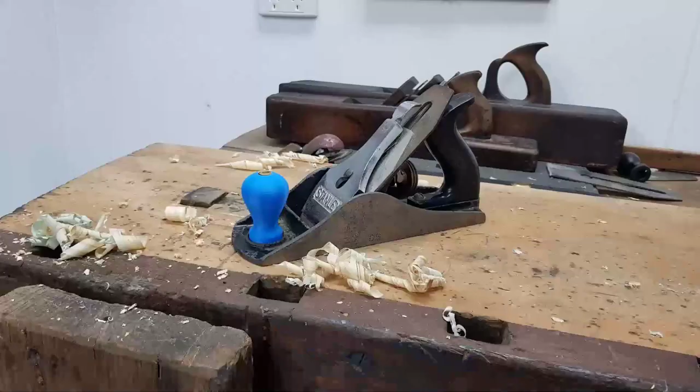Dave here, how are you? Today is the 16th of June, not too long to go to the winter solstice, and also the end of the financial year in Australia. Today it's wet outside, raining and 10 degrees Celsius. It's not much warmer in here.

In Australia we call the thing we put over the top a jumper. You guys in the States might call it a sweater or something like that. We call it a jumper, and some people think that's really weird, but that's how it is. Anyway, today we have a packed show.

I hear a few people haven't been well, changing temperatures and all that. It is going to affect you. I had a bit of a sore throat during the week and thought, here we go, I'm going to catch the flu or some bug. I had options - not worry about it and let it run two weeks, or go see a doctor and get antibiotics. I thought no, I'll go to an old formula to start, see if that knocks it on the head. And it did - saltwater gargle. Some of the basic things we bypass and just go straight to the extreme thing.

So saltwater gargle a couple of times a day, two days, gone. Totally gone. I was thinking I may have to get someone to do deaf and dumb sign language and get someone here to actually do the talking for me. But we didn't. There you go.

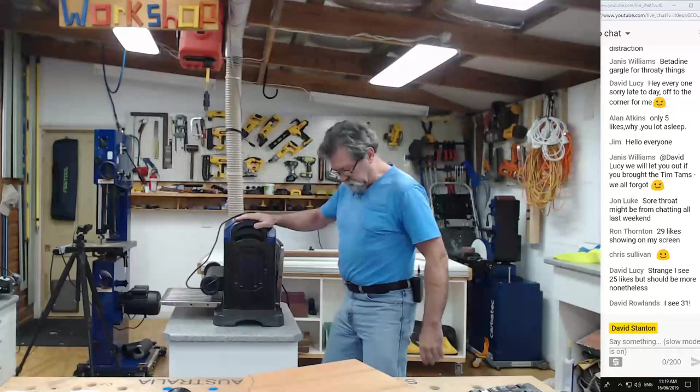Now this is clamped to the table to keep it safe so it doesn't go rolling, and I've got locks on the wheels as well so it doesn't go rolling away. And now I just move him over there, and I'll move this camera and bring this guy in. I want to put it in such a position where you can see what's happening.

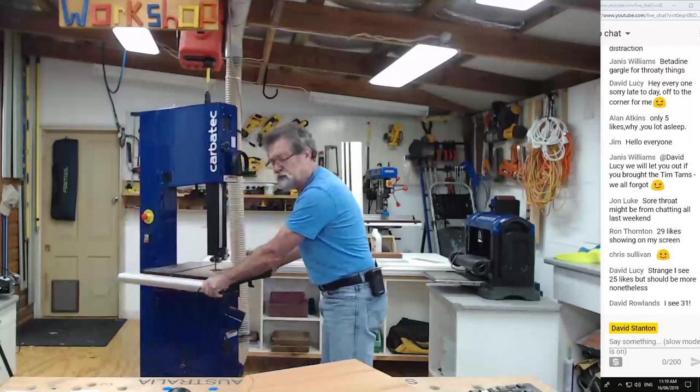Whoop, what do I call it there? That's the clamp, move it. There we go, you should be able to see what's going to happen there. I'll plug him in again, like so. And the dust extraction port.

Tighten him up. Good, and the dust port is open. I'll move this little camera to, let me see, there. Should be okay, and switch the cameras.

You always knock the table out of square if I grab it for wheeling it about, by the fence or table, you knock everything out of alignment. You know what, guys? The wheels on this thing are brilliant, and the lock on this table is fantastic. But thank you very much for the info.

I'm going to switch this around back to there so you can see what's going on. I think that'll work, so if I'm over this side, you'll see what's going on. And again, I'm going to wear the eye muffs. And I need to get the height correct.

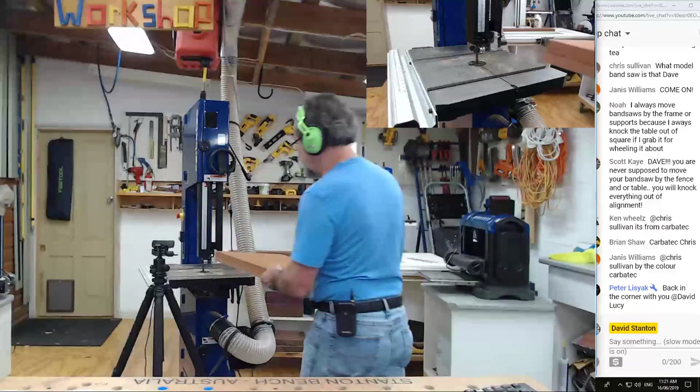Reduce that, and up we go. And down a touch, lock him, and then take it off the wheels. I won't touch the table. There we go, you happy, guys? All right.

So that's all good, I'll turn the Dusty on. Quick drink of coffee. Roger that. Dust extractor, come on, there we go.

All right, I'm not going to finish off, you can see what's happening here. I'm just going to take it running up, I will shape that later on. I want to follow this line. I've got a black felt line beside it so I can see the pencil line a bit better. Let's see how we go.

I'm going to do some relief cuts to start.

This has got a brake on the blade, it's an electronic brake. So rather than drag it, that's pulled all the way back. Rather than drag it backwards and risk pulling the blade back off all of the gear there, that's what I've done. All right.

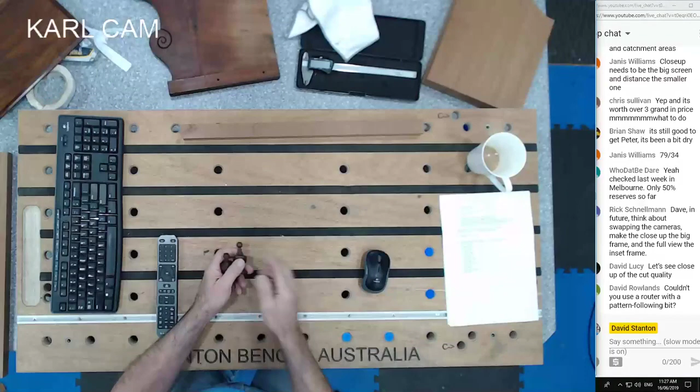Now I'm going to switch cameras to Karl cam so you can see it easier. Up to there, so these are the two. Now the one on my left, this one, is the one that Theo made for me at the show, and that was brilliant watching that. And then this one is the original.

I'm going to clean this one up to look like this. Why? Because the other parts that I'm cleaning up, and this is a part that I've cleaned up, that is a much better match than that. You want to see, I could have done it like that with a pattern following bit, but it's more fun using the bandsaw.

Okay, you want to see the quality of the cut? It's not bad. It's straight. You want to see how good it is? Let me get the square out and we'll have a look.

I haven't prepped for this part, so let's go to the main camera again. You can see my hands there. I haven't changed anything. So you want to see, oh, how good is that? Look at that.

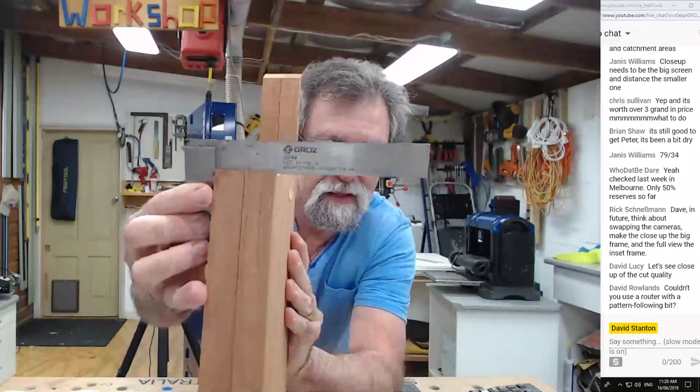And then up the other side. I don't know if you can see it from there. We'll flip it right over, and that's a good indicator, isn't it? Because it's not bad, and I'm happy. I'm happy with the quality of the cut.

As I say, a little bit on the disc sander and the bobbin sander in there, and away we go. Now we're going to clean one of these up. I did this the other week, but let's do it again.

This stuff, the polish reviver that I was using, and the steel wool. Now last week we were at the show, weren't we? So it was the week before.

Vicky cringed when she saw me drag that out of there and polish. She said, 'Oh, you'll cut yourself,' because she had a nasty accident with steel wool, but it was much coarser than this, and it did cut into her finger. So this stuff, being 000, isn't going to have the same effect.

Couldn't use a router with a pattern following bit for this. Damn fine work. Thank you, David.

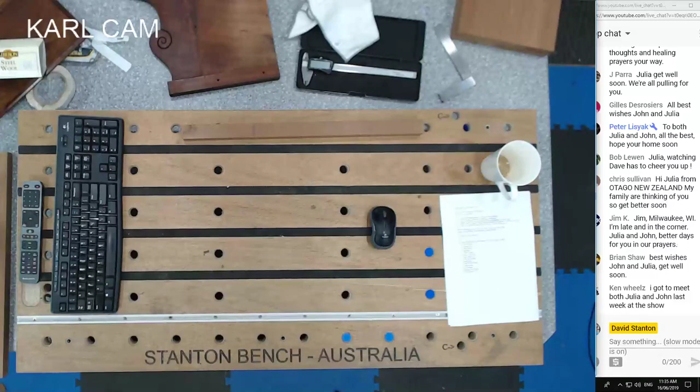Now my mother-in-law will switch the cameras. My mother-in-law is a fan of things that are nice in the garden, so I have this set of wind chimes, which is a monster - these things make a beautiful tone. These used to be hanging up in my willow tree above a nice big table and seats underneath it. But the string holding it up rotted, and every now and then one of these things would just come spearing down like a javelin. I thought, that's no good, we've got to move them. So I took them down, and they've been sitting in the shed for ages. I thought, high time, we'll set them up outside her place, some more chimes for her. So here we go.

I'm going to put those all to the side, and I'm going to take us all into Aspire. Let me see if I've got all of this here - main camera with Aspire.

Now I'm going to do a transition in a second. So what will happen is it's going to take everything over to here that I'm looking at, which is what's running the show, and then I'll load Aspire up. I think I'll have a picture of me down in this corner talking, and Aspire will be up on the screen, and we'll still have the chat coming down here.

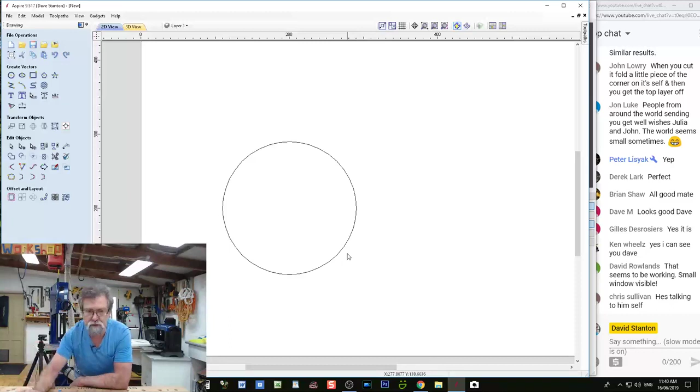If I left click here, I don't know if you can see what I'm doing down there. I'm going to tip that camera down a little bit, and hopefully you'll be able to see what's happening on the keyboard as well. Is that any better, guys? Can you see what's happening on the keyboard?

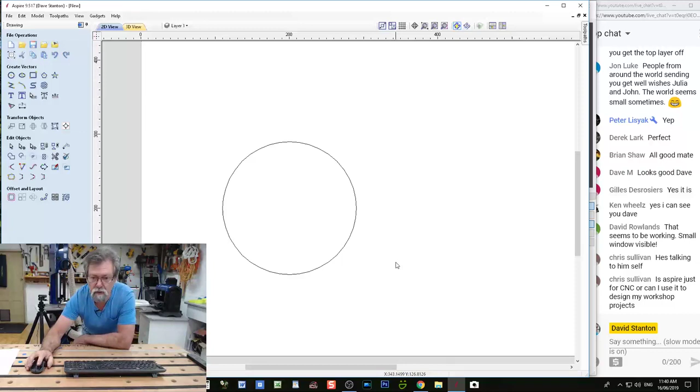Here and here. So I'm going to left click, just for CNC, or can I use it to design my workshop projects? Just for CNC, I think. Now I'm going to left click on the mouse and drag it up, and I'm going to wake that vector up. So I'm letting go of the left button on the mouse. And there you go, I've woken that vector up.

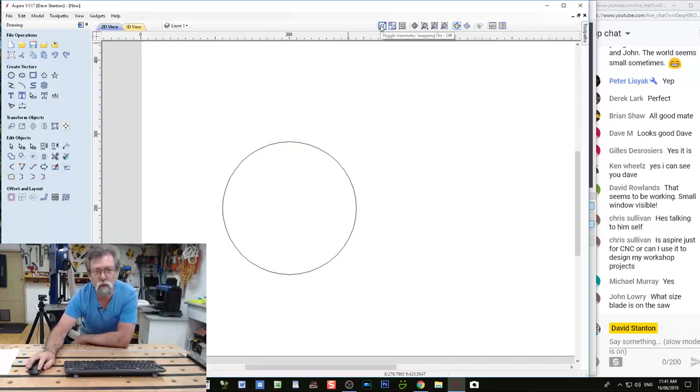Now I'm going to create another circle or two in here. So up the top here I've got this thing called snapping. So that's going to snap to geometry and also smart snapping. And that's going to help me a lot.

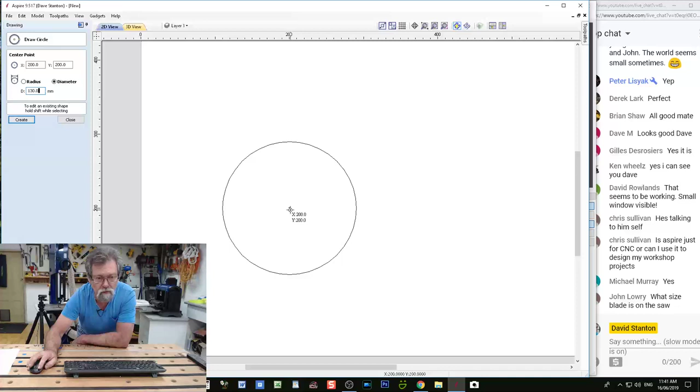So here we go, I'm going to create a circle, and I'm going to do 130 millimeters this time. And I'm going to just go there. See how that little dot pops up? That's called smart snapping. I could put a circle there, or I could bring it across, and there we go. Circle is dead center with the others. As I said, I could have hit this apply, but you know, this is quick. Now I'm going to do another, can you hear the rain outside?

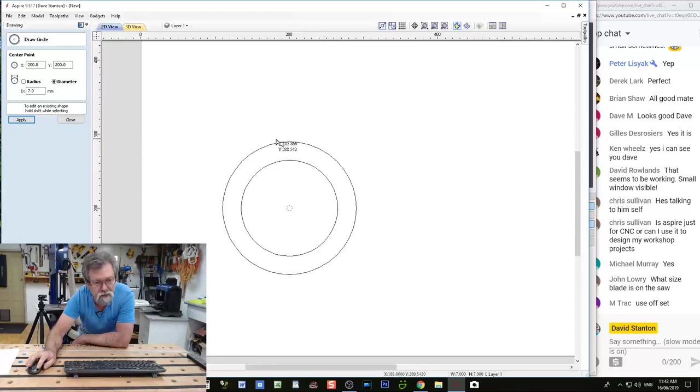It's bucketing down outside. I'm going to do a 7 millimeter circle in the center, and I'm going to do another circle up here for the donga. This is the outside of the circle - let me make it a little bit bigger so we can all see it. This is the line that the holes are going to be drilled in, and this is the center where I'm going to drill a hole later on. This is going to be a 7 millimeter depression, just letting me know where the dead center of the circle is. Now, I want 8 holes because these pipes - let me see if I've got one of these here, if you can see it.

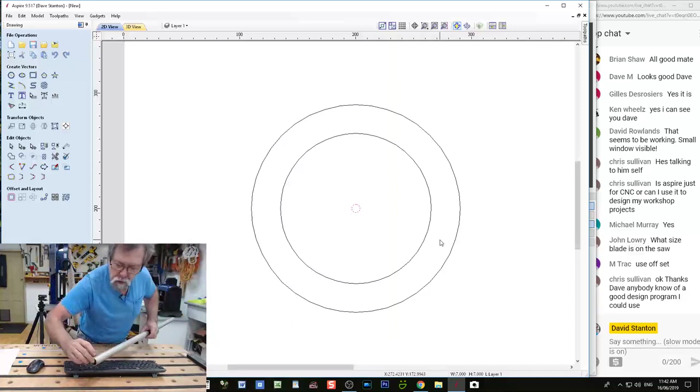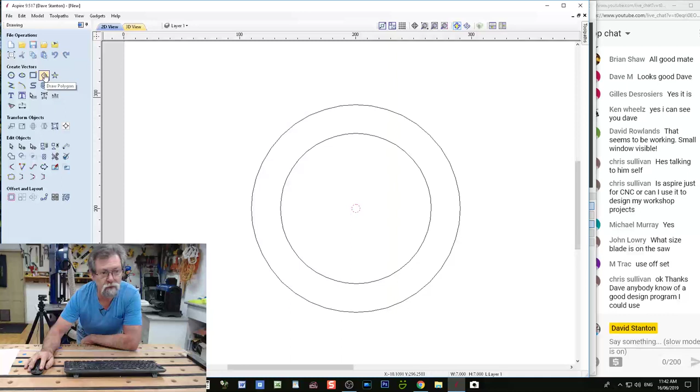These pipes have got these holes either side, with a little bit of pipe through the middle, so that it holds it steady and balanced, and also doesn't deaden the sound of the pipe. So I need to create 8 holes. Now the quickest way is I'm going to go to the polygon draw tool, and I've already set it to 8, but I could go to 9 if I wanted. So I want 8 sides, and half of the diameter - half of 130 is 65 millimeters - so that's what it says up here, the radius I've made 65.

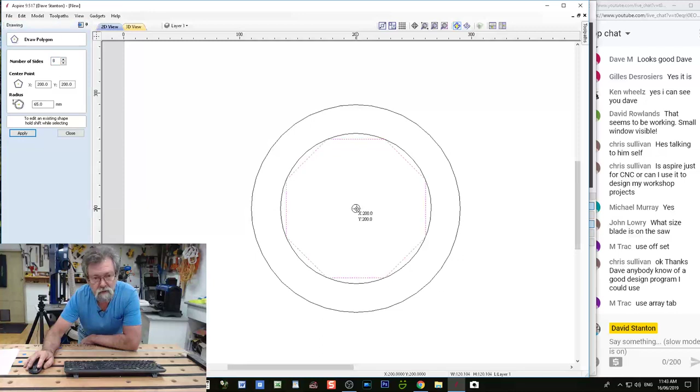Create - well, I'm just going to go there. Done. Now that's pretty sexy. All these other two vectors are sound asleep. This one's awake, and this one's asleep as well. Now at every one of those intersections of the polygon to the circle, that's a smart snapping point for geometry.

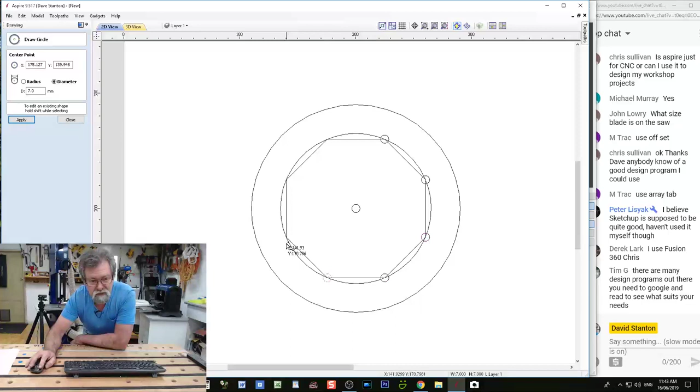So now what I'm going to do is go to the circle - 7 millimeters is what I want - and go there, smart snapping. Left click, left click, left click, left click. If you've got a computer game on your computer, you may want to consider binning it and put something on there like this to have some fun with.

Now I'm clicking off to the side here with the left mouse button, and that's put all the vectors to sleep. Now I'm going to highlight this circle and this polygon by left clicking and dragging up over the pair of them, and it's woken those two up. Now I'm going to push the delete button, and they're gone.

How cool is this? Now this is very similar to a piece of sandpaper. That's amazing - with the dust extraction holes.

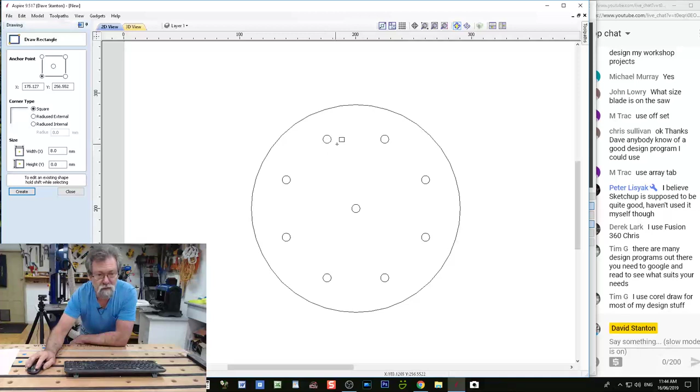Now what I want to do is create slotted holes. I don't want just individual holes because I want this to drain correctly when it gets wet on the outside. So I'm going to go over to the rectangular vector, and I'm going to smart snap onto the bottom, drag up until I hit the top there, and then let go. Going to do the same here, and the same here, and I hope they're working, and the same here.

All right, close. And you might say to me, Dave, well that looks fantastic, but what's all this rubbish here? We've got a special thing called a welding tool.

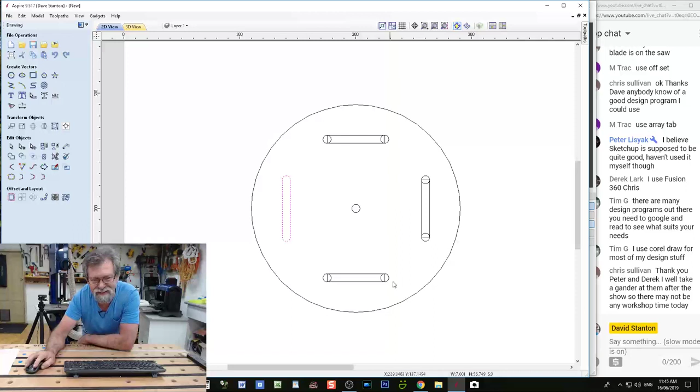Okay, so I've highlighted, woken all these vectors up here, and I said, you know what, I don't want anything in the middle, I want everything on the outside to stay there. So over here we've got this welding tool - there's 3 different functions, but watch this. How's that? And I'm going to do it to this one, weld those together, and the good thing about using the welding tool is there's no holes in the vectors. If it's not a continuous vector, sometimes my machine doesn't like it. So there we go, weld that one together as well.

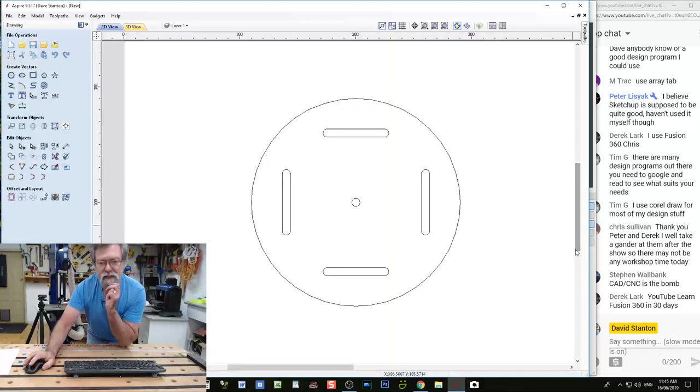There we go. Now I have that there, and I think I'll stop at this point here. And what we're going to do now is we're going to go with what's called computer aided machining. So I'm going to click this button up here, which is going to take us over to the toolpath commands. Now you'll see here I've got a whole new menu bunch over here. Now I'm only going to be using this guy here, that one, and that one.

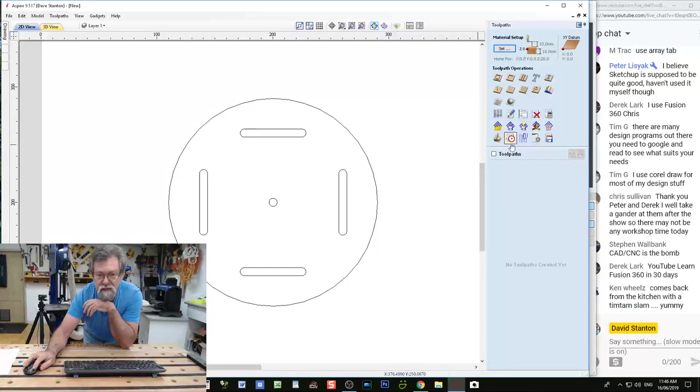So what I'm going to do is highlight all of it, wake all of the vectors up, and set it up for a spiral down cutter because I don't want any tear out. I don't have a spiral up/down at the moment for a 1/4 inch cutter, so I'm going to do all these with a 1/4 inch cutter.

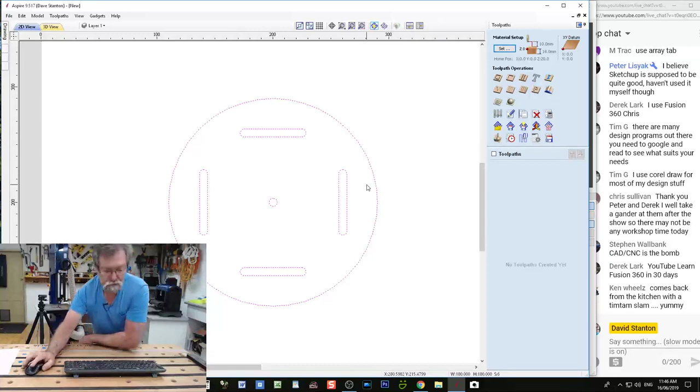With anything, this is basically just doing a drawing on a computer instead of a drawing with a piece of paper and a pencil. But this allows me to get extremely accurate and do stuff on the CNC.

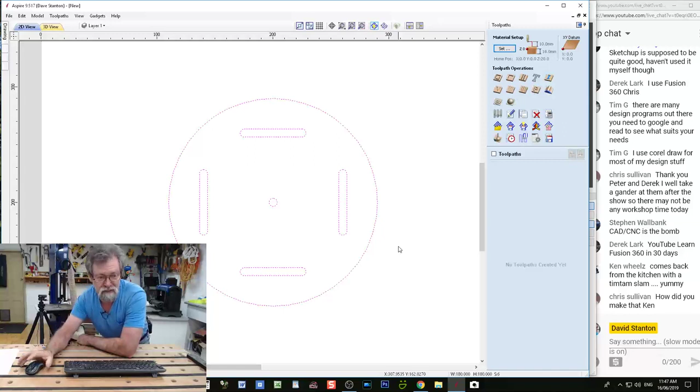So what we're going to do is push the shift button and select that vector and that vector. And, hold on, no, I'm going to select them all again. I'm just going to remove this one. I'm being an idiot. All right, that'll do.

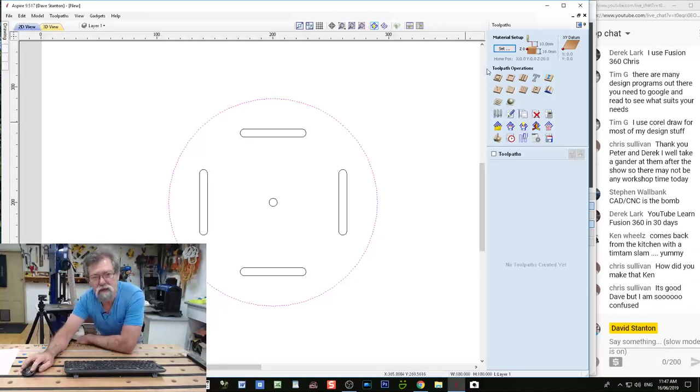What I'm going to do now is go to the toolpath, profile toolpath. I'm going to give it a name down here, and we're going to hit the caps lock. Perimeter, spiral down. Now that's going to let me know, when I save everything, what I'm doing.

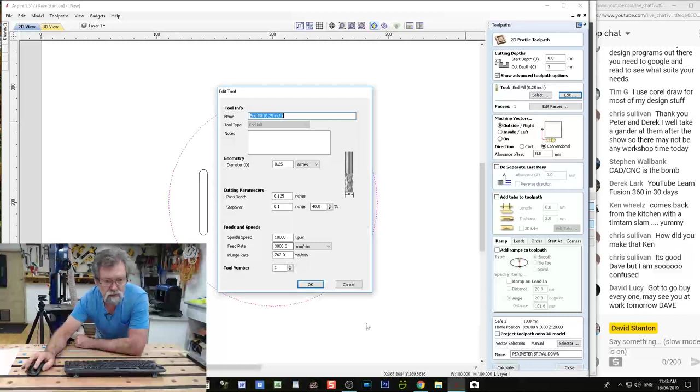So I want it to cut 3 millimeters and start from the 0 point. The tool I'm using is a 1/4 inch, which is 0.25 of an inch, sorry, 1/4 inch, which is 6.35 millimeters, spiral down. I'm going to have a look at what speed it's turning at - 18,000 RPM - and it's going to go 3 meters per minute. That's fine, leave that there.

And I want it to go around the outside. I don't want it to go on the inside of the vector, I want it to go on the outside, which means it's going to go that direction. In conventional, if it was climb, it would go the other direction. The climb means it wants to climb out of there, big time, so be careful with that. Make sure that you've got conventional. When you're doing carving, it's always climb, but conventional for when you're cutting out.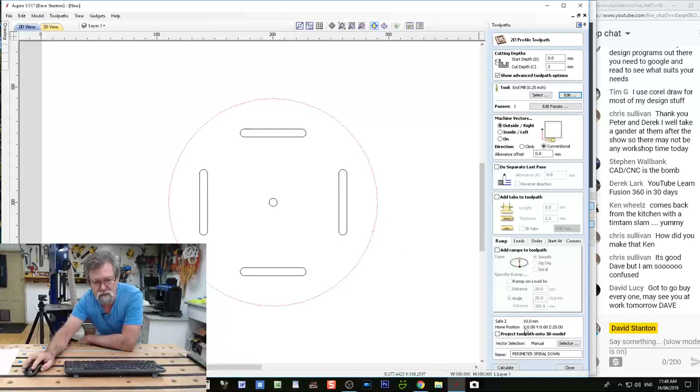I don't need any tabs or anything like that. I'm 10 millimeters down here. See that says the safe Z? That means whenever the machine goes to another point to start doing something, it's going to go up 10 millimeters above the board so it doesn't just start plowing trenches all the way through the job.

Okay, so that's all good, and I think I've got everything there. I don't want to do any separate passes. I don't want to add tabs at this point because I'm only going 3 millimeters.

Calculate. Now you can see there, it's shown it to me on that pine. I don't want pine, I want cherry. Why it did that, I have no idea. Cherry, there, lovely. Okay, now I can preview this, and I'm going to slow it down a little bit so we can see it happen.

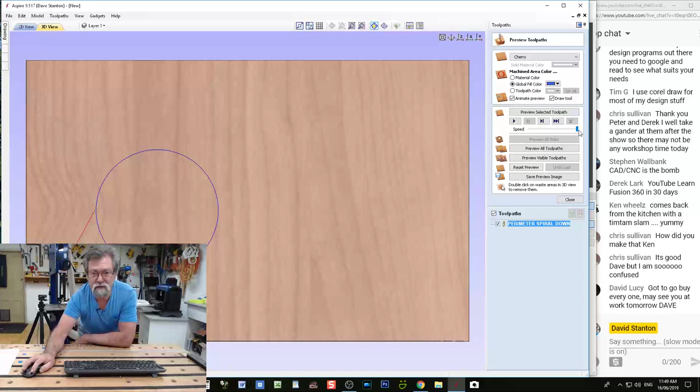Here we go. There we go. Now that blue is a color that's not the same as the background. If the cutter goes all the way through the board, I would see that mauve, not the blue.

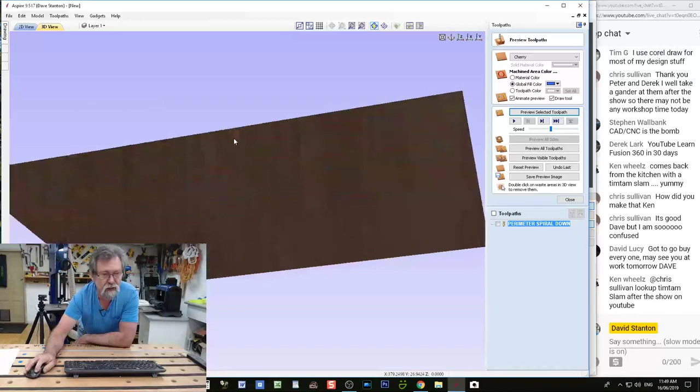And I can have a look at the other side by rotating it. I'm pushing my left mouse button down, pushing the mouse away from it. And you can see nothing has come through. Now I can go back over here, see this Z? It's going to say, I want to see the plan view. I push Z and it takes it back automatically.

There it is. Now I want to do some more work, so I'm going to go out of 3D back over to 2D, and I'm going to do some cutting on these.

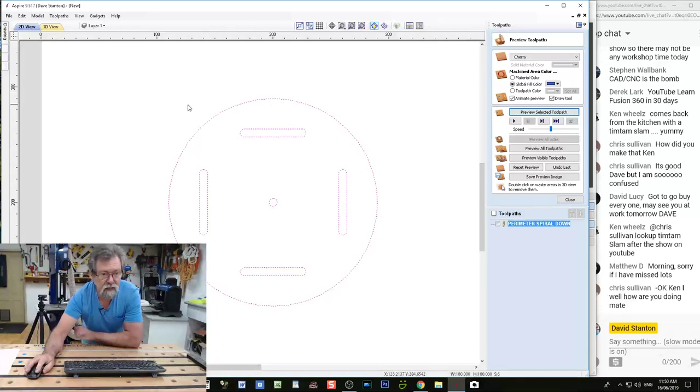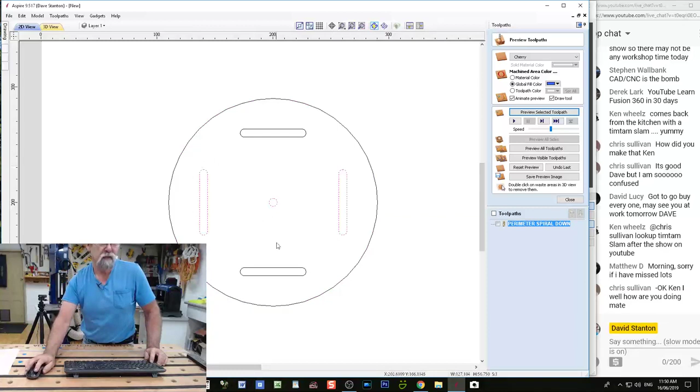Now I can highlight the lot again, and then click on, let me see, these, no, let's start that again. I'm just going to highlight them individually. That one, and that one. So I've left clicked on the mouse button and dragged it while pushing on the shift key. It's not the control key, it's the shift key.

We'll close this one. Now I want to do another toolpath, and I'm going to call this slots, spiral down, slots.

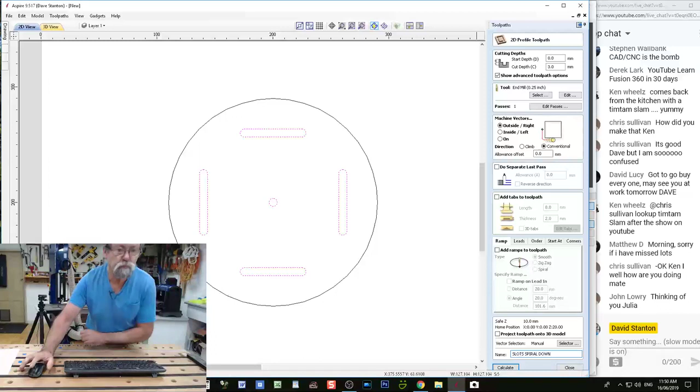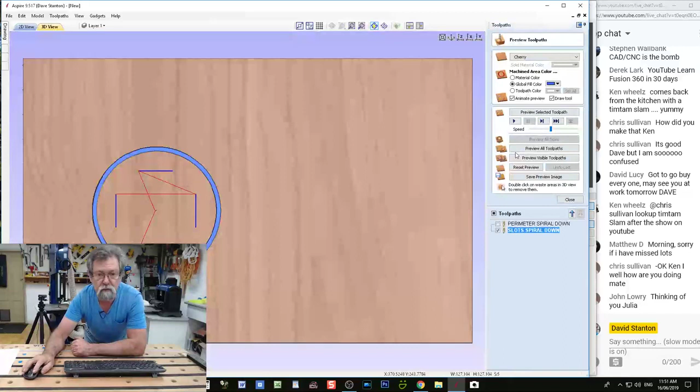3 millimeters is correct, and instead of on the outside, I want it on the inside of the vector, so it's going to go around the inside. Don't worry, I've had that mistake happen before. Everything is good there, all good, all good, all good. Calculate. Done. We'll have a quick preview of how it's going to go.

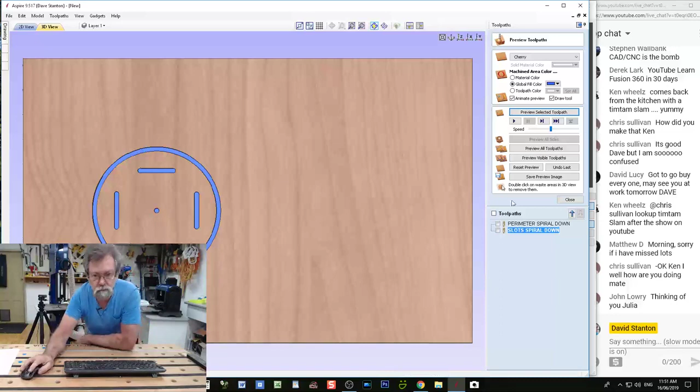Done. All right, now the thing is, the string is going to go from here to there, and from here to there, and from there to there. That's where the tubes are going to be held. This one in the middle is where the string is going to go down through the middle to hold the donger and the little wind paddle. Close that and go back to 2D.

Right, now whilst I've got that there like that, I'm going to create another, we'll just shut that. I'm going to create another toolpath, and I'm going to call this spiral up, because we have to change the tool and do that kind of thing. Give me a second. Okay.

Well, I'm starting to read some of the chat here at the same time.

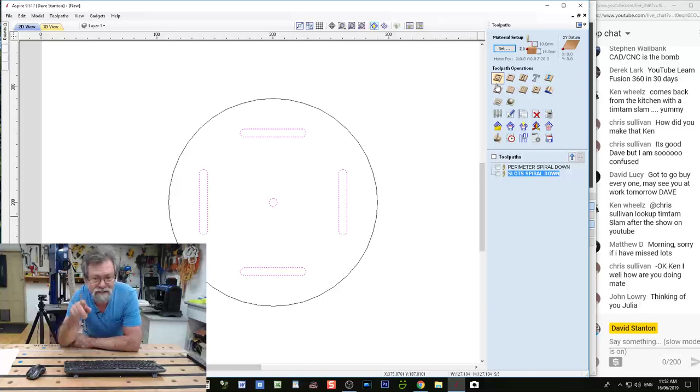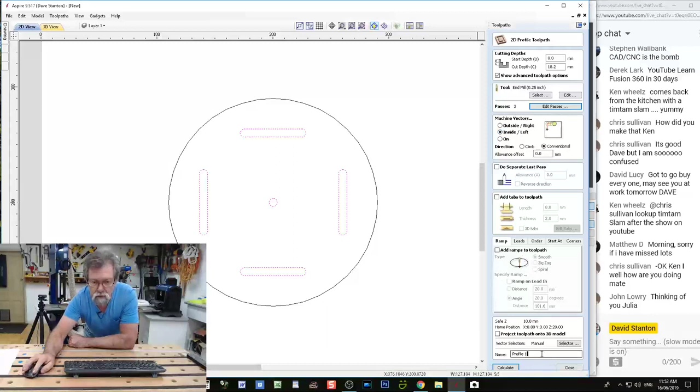I shouldn't be distracted. All right, spiral up, and we're going to do the same toolpaths, and this time we're going to make it 18.2 millimeters deep. And I want to edit the passes down to 3, so I'm going to click on that to 3, okay. And I need to go on the inside, which is correct. I don't want any ramping. I'm going to call this slots spiral up.

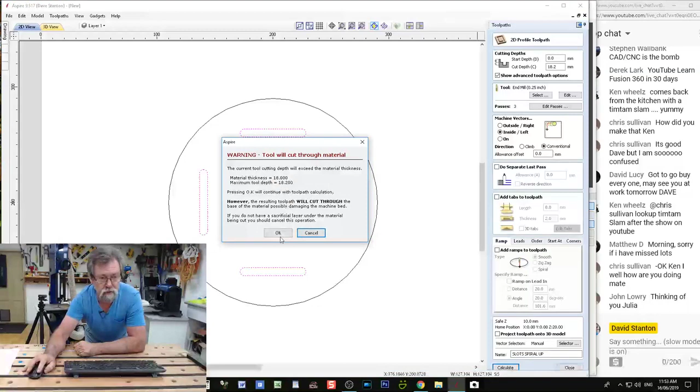And I think everything is good. When I click calculate, it's going to warn me that I'm going to cut through the material. There it is, 18 millimeters. Your cut is 18.2, are you okay with that? Sure am, buddy, that's what I wanted.

Now I'm going to preview that, and it'll take me all the way through. You can see the mauve appearing in the background. And I can roll the whole thing over so you can see on the other side, I have in fact come through. Go back to the 2D view.

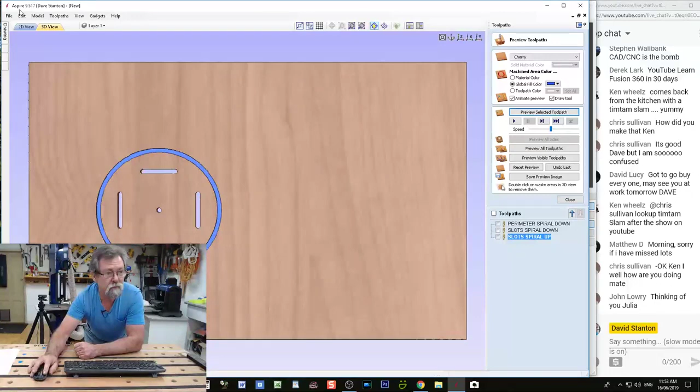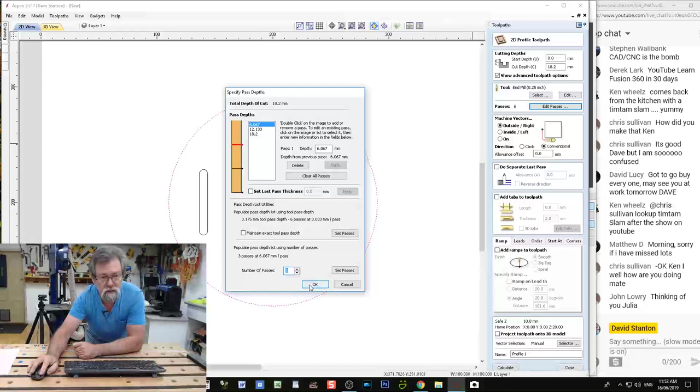And now I'm going to go back to 2D, close this view over here, and we're going to go onto the outside. And we're going to create the toolpath for that one, and go on the outside of this guy, 18.2. I don't want 6 passes, I want 3 again, because 6 passes, why would I? 6 millimeters is fine in one pass with that cutter.

Now here I need to be careful. I need to add some tabs. Now the tabs are the thing that I was talking about the other day on the video that I've just done. They're going to be 8 millimeters long and 2 millimeters thick at the bottom of the slot. And that's going to stop this thing, when it's cut all the way through, getting hit by the router cutter and flying across the room or smashing something.

So I need to edit the tabs now, and I want a constant number of 3 tabs. Add them, and there they are. Now I can add tabs by just left clicking on there, or I can left click on an existing tab and get rid of it.

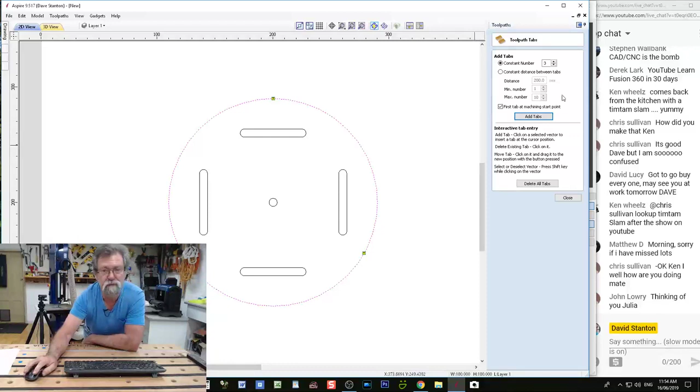That's good, and we're going to have a look. I'm going to make sure everything's right. 3 passes outside of the vector. Tabs are there. Safe Z is 10 millimeters. Calculate, I know it's going to go through. And now we're going to have a look at how it looks.

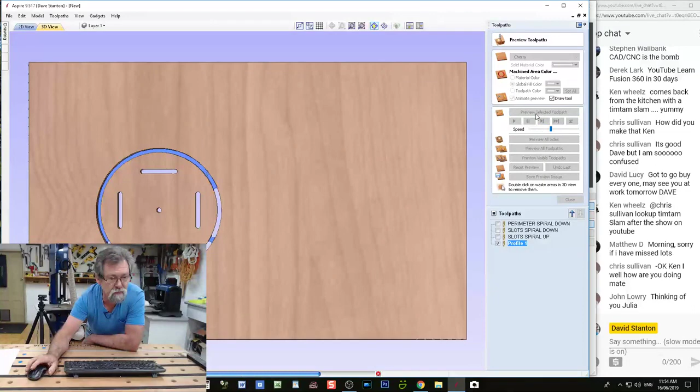Around she goes, 2 rotations, 3rd rotation, and left the tabs. There's the tabs there, see, it's like an Airfix kit. It's holding it together so that, you know, that could be dangerous. I'll flip her over and just make sure that I've gone all the way through on everything. Yep, beautiful, back to there.

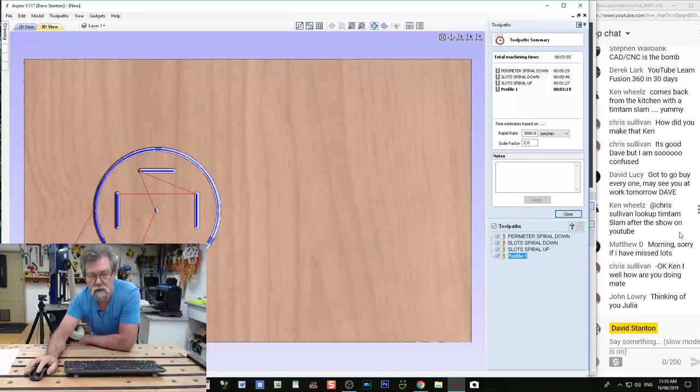And now, if I click on each one of these toolpaths and close this thing and have a click on the clock, it's going to tell me how long it's going to take to cut this out. 3 minutes and 55 seconds to do the whole job. But I do have to do the tool change, so it's going to be a little bit longer than that.

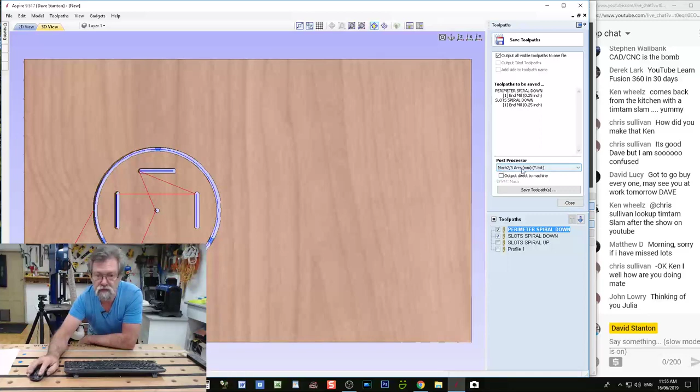Close that. Now I'm going to save the first 2 as a pair of toolpaths, like this. And you see it says spiral down, because I've got to change the cutters during the process, and I want it to be saved as Mach 3 in metric. So there's a whole heap here that I could choose from. That's the one I need for my machine. Save the toolpath, and I'm going to the USB, which is, I think it's this guy.

Perimeter spiral down, that'll be a good enough name for it. And so that's saved. Now I'm going to close those two, and highlight the bottom two, and save those toolpaths as slots spiral up. That's fine.

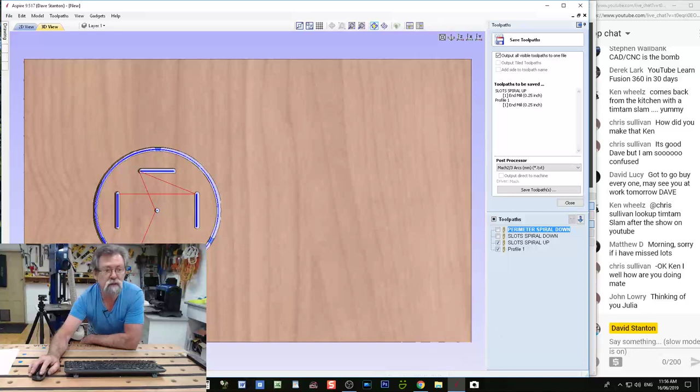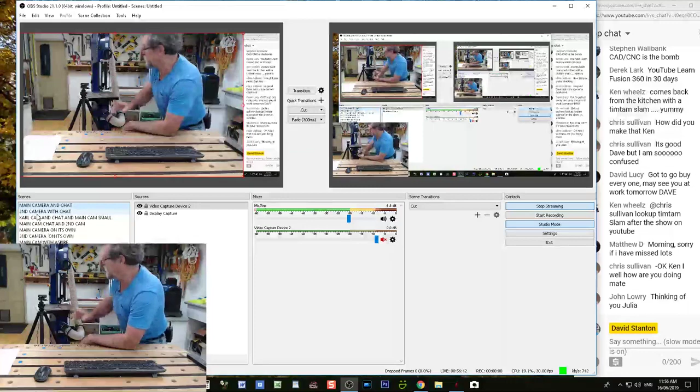Right, now I'm going to get out of this, and let me see if I can minimize that and go back to the main camera. Are you guys learning anything? That's reasonably quick, and it's very basic. Other people are much better at this than me. But let's head over to the CNC, and I'll get that main second camera.

Where are we? There it is. And I'm going to transition it now and take it out here. Where are we? Hopefully it doesn't catch on anything on the way through.

And I'm going to check that everything is looking okay there. You know what, that's not too bad. I'll tip it up a little. I can't quite see it from where I'm at. There we go. How's that? All right.

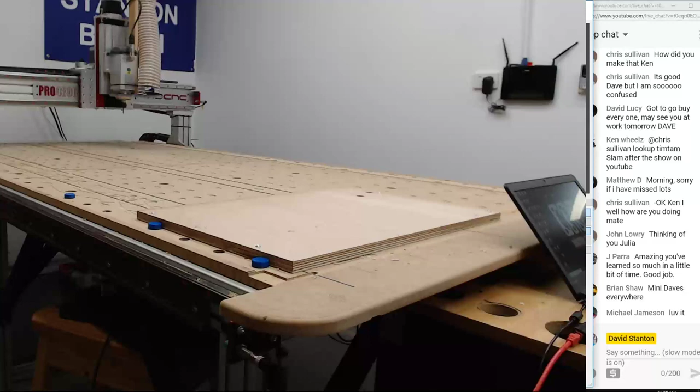First, I won't be able to read any of the chat while this is happening. Mini Dave's everywhere. Yep, Michael, you're enjoying it?

That's great. All right, I need my ear muffs, and I think I will use my remote as well out here. I won't put the ear muffs on quite yet. I'll turn the other lights on out here. There we go, a little bit more light.

Now I'm going to turn the machine on, and I'm going to load up. You might want to watch what I'm doing on the monitor as well. How's that? Yep, you can see.

All right, so down here, Mach 3, enter, and it's going to load up. So the first thing that's going to happen is the reset button's flashing, so I need to say, yeah, I'm aware. That's a little safety thing, so it just doesn't start.

Now I'm going to bring that guy back here, and to do it quickly, you push the shift button. Close enough, and then across, and then down. I don't push the shift button when it's going down, I don't want it to smash itself. Back over here, I'll bring this back over here now, because this is an interesting part.

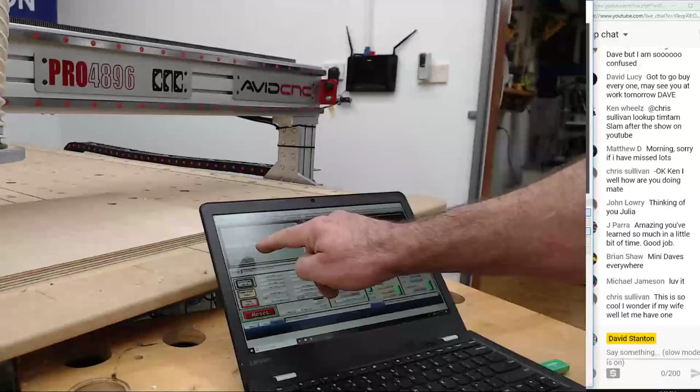And you can see over here it's got some stuff happening, and now it's all gone to metric. So I need to ref all home. And so what it's going to do is take this up to me and across till it's home. So up she goes.

This is the machine now talking to the computer and getting itself sorted as to where it is. Okay, now you can see over here, it's going to look really weird because it says it's 200 millimeters away from where things are, minus 1.6, minus this.

So now I'm going to use the touchpad to tell it where this corner is. So I'm going to now page down and across the x-axis and then back down the y-axis a little bit, maybe back a little, sneak it around.

Now we've got this thing called a touchpad. This guy here is what's called a touchpad. This is a magnet that's going to, well first of all, I've got these lips or little edges on the pad, and it sits on the corner of the material that I'm going to be cutting. This is magnetic and connects to there.

Now what's going to happen, when I tell it to auto 0 Z, X and Y, this cutter is going to come down and touch. I can touch this because the variable frequency drive is turned off. This is dead, nothing can start this.

I stay over here beside the emergency stop just in case for the first part.

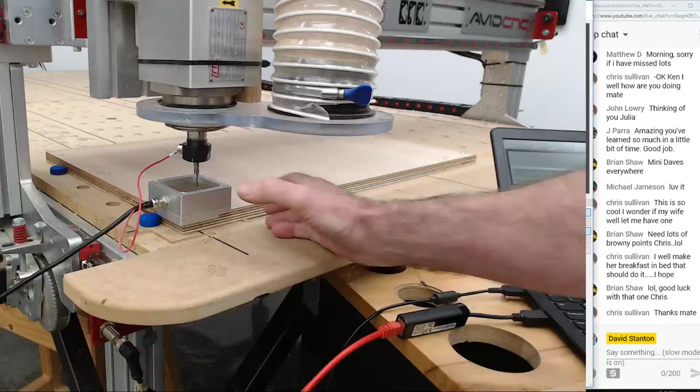Done. Now I'm going to make it travel this way and touch here. Because I've rotated the spiral cutter to the point where the edge of the flute is going to be the most outside part of that circle, or the perimeter of it, should be fine. Enter and it'll travel across.

Now I'm going to rotate it this direction because it's going to go down the y-axis now and touch over here. That's all sitting well. Down she goes until it touches and completes the circuit.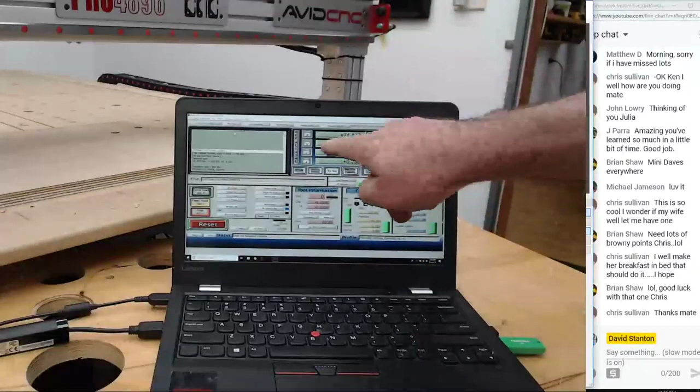Back and up. Beautiful. Now, you'll notice when I take all this off and put it down here on a sponge cushion, all of the coordinates now are different. It's saying 0 is 24 millimeters away from it is, 24.8272, and 38.1 above.

You watch this. I'm going to tell it to go to 0, and it's going to come right over to the center of the cutter. We're right on that corner. There we go. Go to 0. Isn't that insane? I love it.

Right on it. Now, I'm not going to put the dust shroud on, but I am going to lift it up a little bit. You can see the circle and all the coordinates, and you can see where the corner is right there. So I'm clear of that screw. I've put a screw to hold it down, and there's a screw way over here as well.

I think you should get a good view from there, so I'm going to move this over a little bit. We're about to start the machine up, so I'll start the dust extractor up in a second. I'm going to come back out here and have a quick look.

Don't try that with a V-bit. Do you have to do this with every project you set up? Yeah, but I'm slowing it down a lot for you guys. Once you start doing this kind of stuff, it's automatic.

Now I've got these guys on, so I'm safe here, and believe me, you want to wear them. I'm going to turn the dust extractor on first. That's outside. I haven't got the shield around here, but there is a bit of a draft happening here. It's going to throw a lot of rubbish around, but just for demonstration, you guys will want to see this.

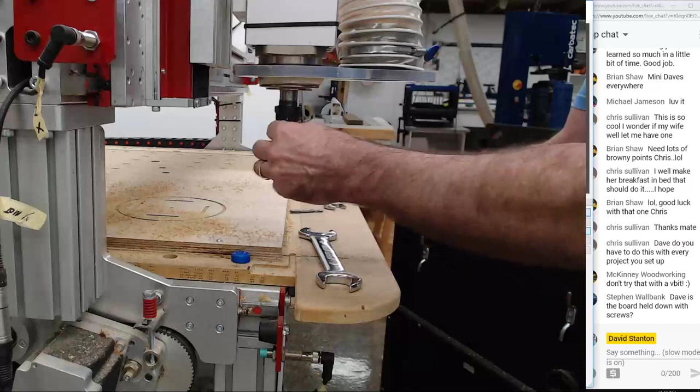Now, ordinarily, if I'd been doing a fair bit of work, I would take the collet out and shake it and give it a tap to remove any dust. But that's such a small amount that I've done there, it's not worth it. Tighten it back up, because there wouldn't have been anything going in there at this stage. And I give this, with the strength of Samson - I do not want anything coming out of there while I'm cutting. Now this is a spiral upcut, so it's going to be turning and lifting sawdust up towards the machine. Remember, spiral up is towards the machine, spiral down, which is this one, is down away from the machine. You may be able to see the difference in the flutes.

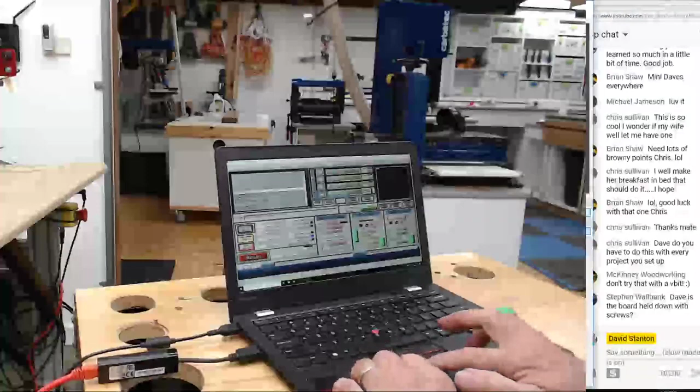Okay, good. I'm going to change the - I'll bring you back over here so you can watch what I'm doing. I'm going to get rid of the G code, and load the new G code, which is the slot spiral up. That's what I called it. We'll open that, it's going to load it into there. There we go, it's only a text file, that's all it is. Now it's all been set, I'm not changing anything.

Now it's 135 above. I'm just going to go page down, and you watch it's coming down to 0. So it's 4.975 above 0. Okay, so if I say go to 0, you can watch it. There it is. Oh, it's beautiful. Oop, that isn't 0 - of course, I've got to touch the bottom because I've changed the cutter. Okay, that was nearly a big mistake. See, always thinking. And I bet you there were people in the background saying, Dave, you haven't set the 0 for there. There we go.

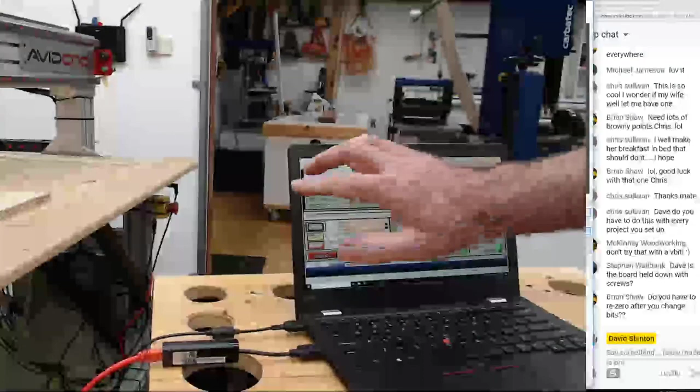I'm not going to change the X and Y, I'm just going to change the Z because I've changed the cutter. The X and Y are exactly the same because it's still a 1/4 inch cutter. Not a problem. Now I need to auto tool 0, and it only offers me the Z always - it offers me the option of doing the X and Y if I want to.

So I've got the magnet on. It's very important - make sure if you don't have the magnet on, it's just going to bury itself into that, and that's ugly. And you know why I know? See that black tape? Say no more. And I'm going to hit the enter button, and she's going to start going down. I'm standing beside this, once bitten, twice shy. Done. There we go.

I'll take this off. Now, if I tell it to go to 0, it should come straight over to here and be good. Oh, look at that, don't you love it? There we go, perfect. That wasn't a mistake, I did that on purpose.

Okay, here we go, I'm going to make sure that you guys can see what's happening. And I think you should be good. These things here I built as a protection for the sensors. These sensors here are extremely sensitive, and I don't want anything to happen to them. All good, 10 past and we're still cooking with gas.

I'm going to do a quick read. Give me a second, I'm over here. Here we go. Dave, is the board held down with screws? Yes, it is, Stephen. Do you have to re-zero after change bits? Yes, I do, Brian, I did that just for you.

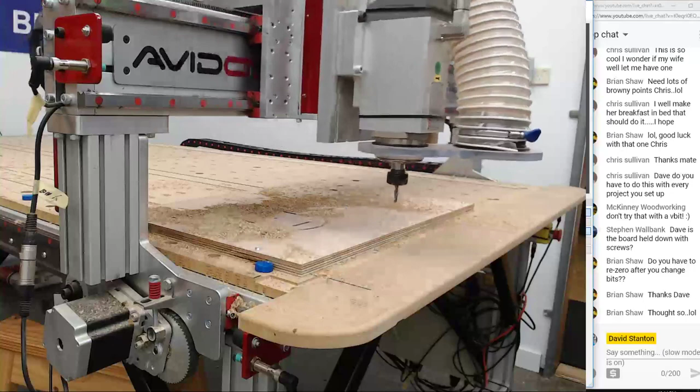I'm going to page up and across. I hit the shift button to make it go quickly, and then down the back a little bit, out of the way.

I'll turn off the variable frequency drive, leave that cutter in there, and I'll get a chisel and we'll lift it out. Small chisel and my mallet, and I'll turn the dust extractor off, take my ear muffs off. Can that one, beautiful. So we have...

That's so nice. The tabs are down there somewhere. Ordinarily I would bring my little dust extractor in.

Okay, there's a tab there. And there's a tab at 12 o'clock. And a tab down here. Just dragging along so I can feel it underneath with the chisel. That should have it released.

Look at that. Now, it was slightly larger than 18 millimeters. And there as well.

Every now and then I have to do a little bit of a clean up after it, but I'm gonna put a round over, and I'm not doing that today. I haven't got time, but that's it.